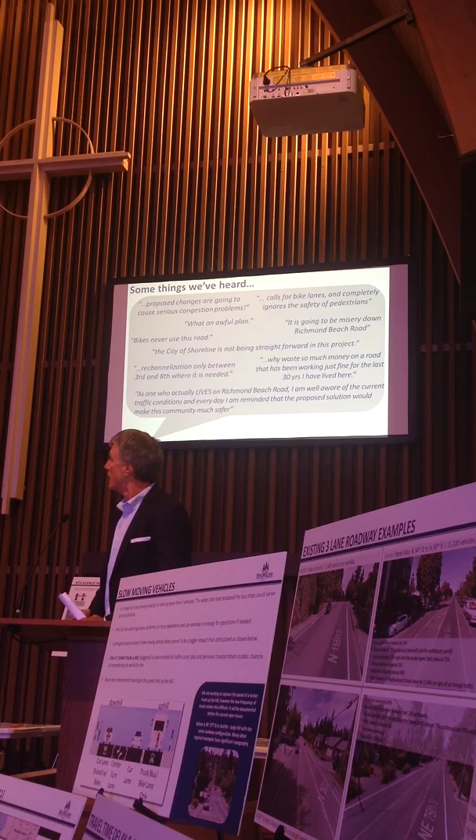Take some time to learn about what the city's talking about doing on Richmond Beach Road, but also time for us to hear what some of your thoughts and concerns are on the project. It's really early in the project, and we'll talk about that a little bit more later. It's timely to have this meeting to learn from you, and hopefully you can learn from us.

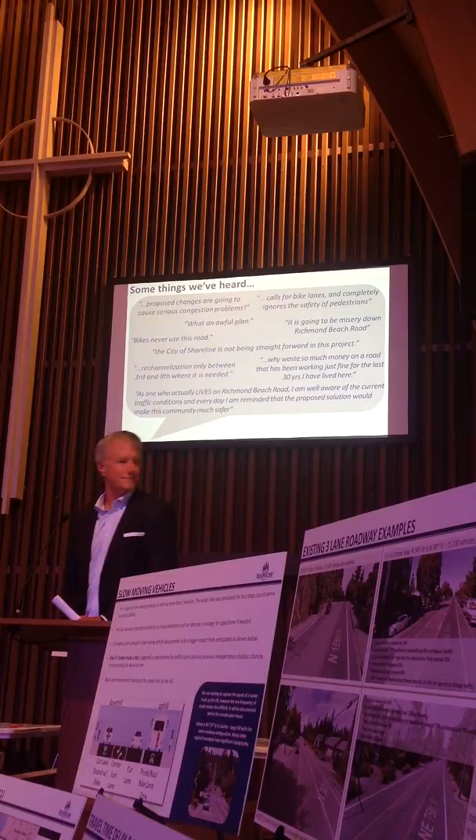For the structure of tonight's meeting, we're going to have a presentation for about a half hour. We've gotten a lot of questions over time, and we would like to take some time to share information with everybody so that we all have that same information. From a staff perspective, it helps us then talk with folks.

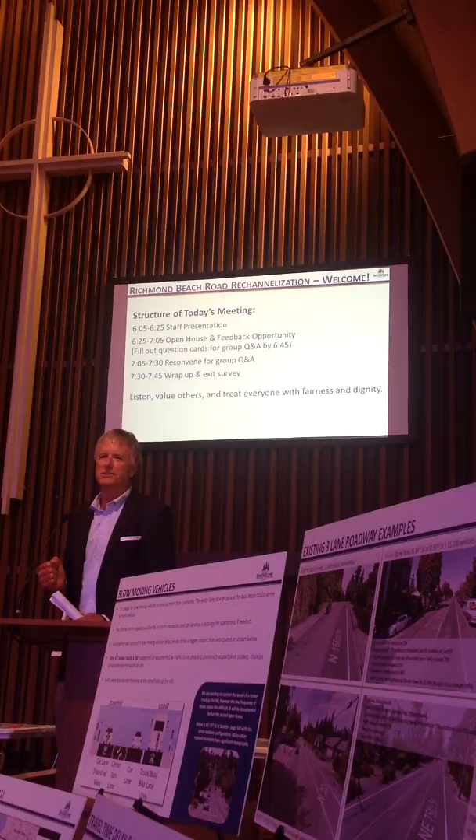There is a frequently asked question handout that's around at the different tables, and we'd like you to get one of those. It kind of guides what we're talking about tonight. We've gotten so many questions on this - usually these FAQ handouts are like 2 pages long, but this one has a lot of pages because they've been great questions, and it takes a little bit of time to answer them. Our format of tonight's presentation is also based around the questions that we've heard you ask.

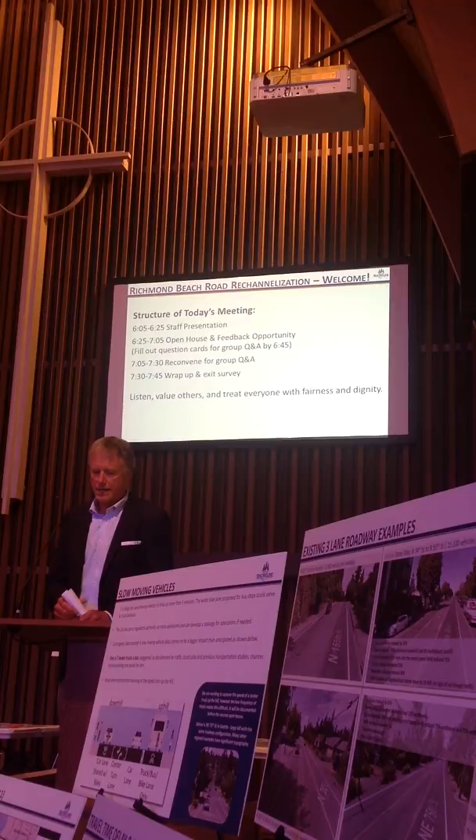We're not going to get up here and lecture you on this, that, or the other thing. We're going to try and take the questions and answer them and get the story out for everybody. There is a lot of content and detail in tonight's conversation, though we're not able to walk through them all in the presentation.

So we'll go through the presentation, then we'll take a break for about another half hour or so, a little bit longer, to be able to answer and talk about what you heard, what you learned, or if you haven't seen the board, walk through that.

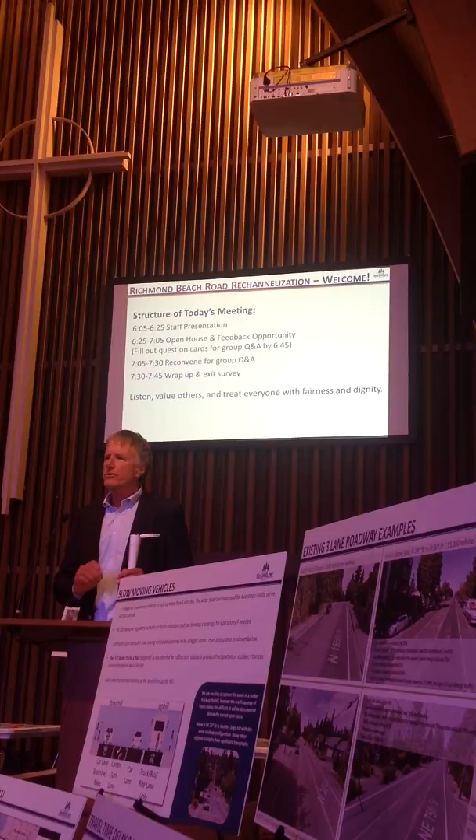In that time, you'll also find some cards with questions on them, and as you learn about it and hear from us, if there's some other questions you have, or you're not quite sure they're getting answered, please fill out that card and put them in the basket.

That's going to lead to the last part of the presentation, where we will go through all those cards and aggregate them into themes and come back and say, here's some questions we heard, and we can talk about the answers to those questions. That way we can try to answer 20 people's questions at one time.

And then about 7:30 or 7:45, we'll wrap up, close down, and we will retire out of here.

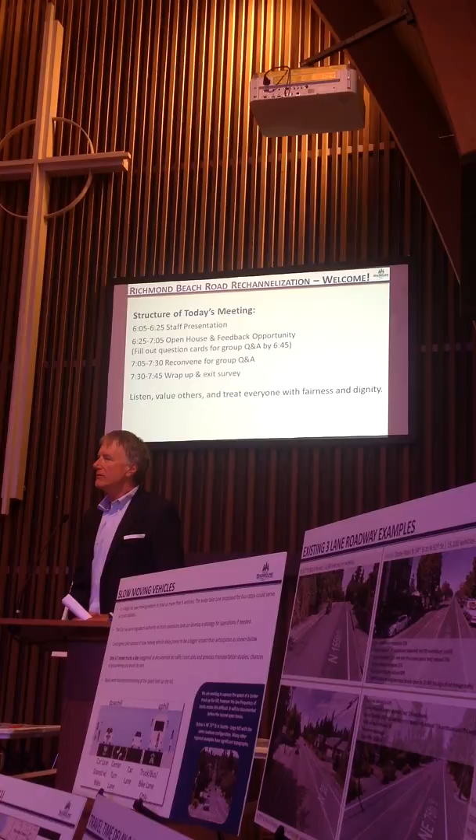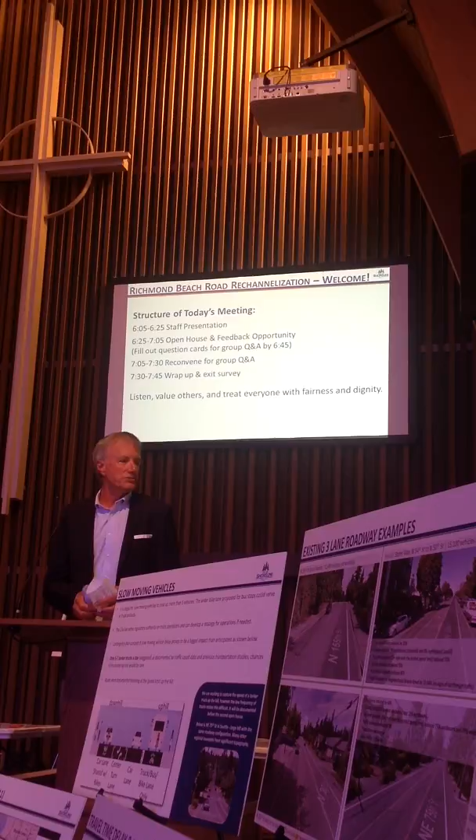With that, I'd like to introduce Kendra Dedinsky, who is our city traffic engineer and has pulled together a lot of the information for us today and can explain in whatever level of detail we need the traffic and accident history behind what we're doing here tonight.

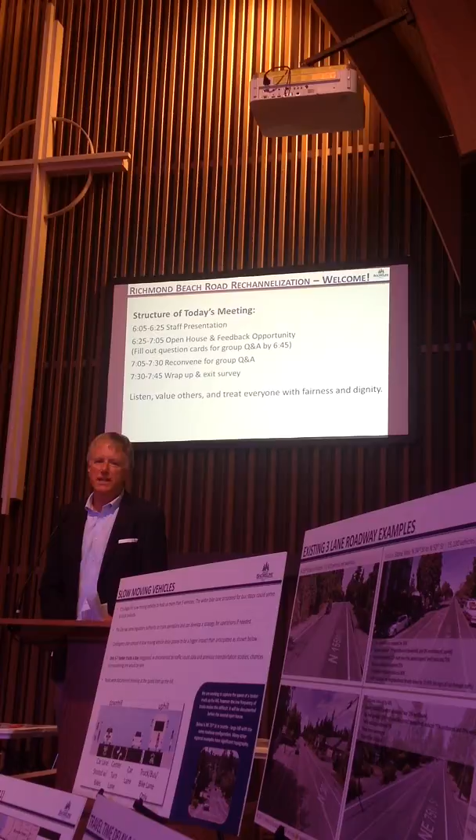Kendra. All right. Could you repeat your name, please? Yeah, Kendra Dedinsky. Oh, that's loud. Okay, you all know it now.

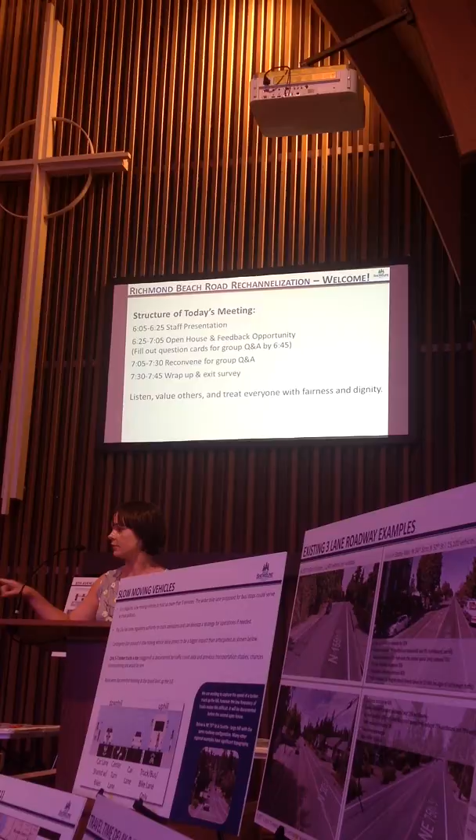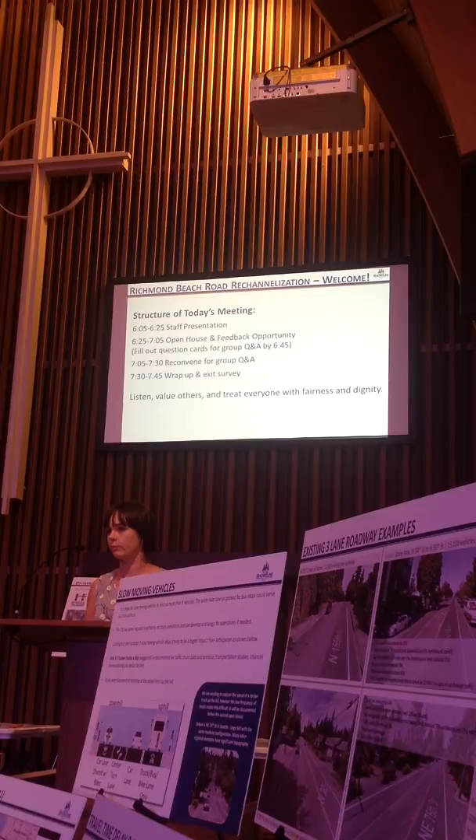One point of clarification - Randy said there's some FAQs, but those got snatched up pretty fast, so we may not have them. But if you look around at the boards here, our project website is listed, and they are available there. Those of you with smartphones can go ahead and pull them up via PDF, or check when you get home. A lot of the same content is duplicated around the room, so hopefully we're able to get to all of your questions.

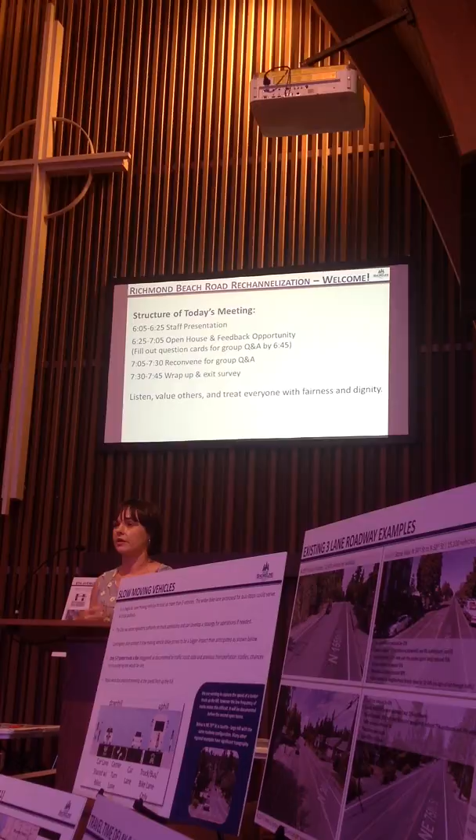All right, so we'll move into a couple of background slides, and then I'm going to show a short video. But to start with, for those who don't know already, the project is proposed to restripe Richmond Beach Road from 4 lanes to 1 lane in each direction and a center turn lane. A lot of the intersections contain some of the same functionality as they do today, retaining some turn lanes like at 8th, for example.

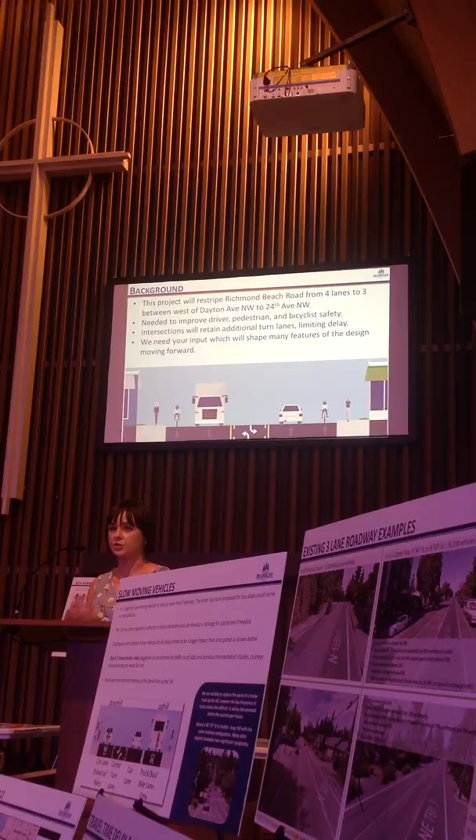We would invite you to take a hard look at some of the intersection designs we've laid out, some of which even provide travel time savings. The project is largely needed to improve pedestrian, motorist, and bicyclist safety on the corridor. Over in this station we show the history of collisions on the corridor, and what we're proposing is a proven safety countermeasure as recommended by the federal government. We'll talk more about collision history after we finish the video. We're looking for your feedback, so we hope to hear your preferences for the design choices we're proposing. Some variations on intersection design are shown in these tables, and we want to hear what you think about one option over another, or other concerns.

So how did we get here? There are a few things that set this in motion. The starting point is the 2011 Transportation Master Plan, which slated this corridor for bike lanes. But really the most important factor is safety. This strategy is a proven safety countermeasure, shown across the board to improve safety. The collision history shows where we have issues, and it's not just in a single stretch—it spans the length of the corridor, and this is a great way to address those issues. Where we are today is that Council has approved this plan and adopted it, and we're now looking to get feedback on how we refine that design. This project is responsive to where we're at today with collisions on the corridor.

We're not going to take questions right now.

Clarification—the council has approved the plan? As part of our capital improvement project, yes. So this is all kind of moot? No, not at all. We have many elements of the design that are up for refinement, and we can talk about the choices. You'll see there are multiple options and alternatives for certain locations. This is already being paid for. Let's wait, because this sounds like a question we'll answer at the end. It's a statement, actually, because you've already said this has already been approved. The project in concept has been approved; the actual project itself we're still working to define and design right now. Let's hold questions, and I can definitely answer that at the end. But we want to give context and provide information before we move forward with decisions.

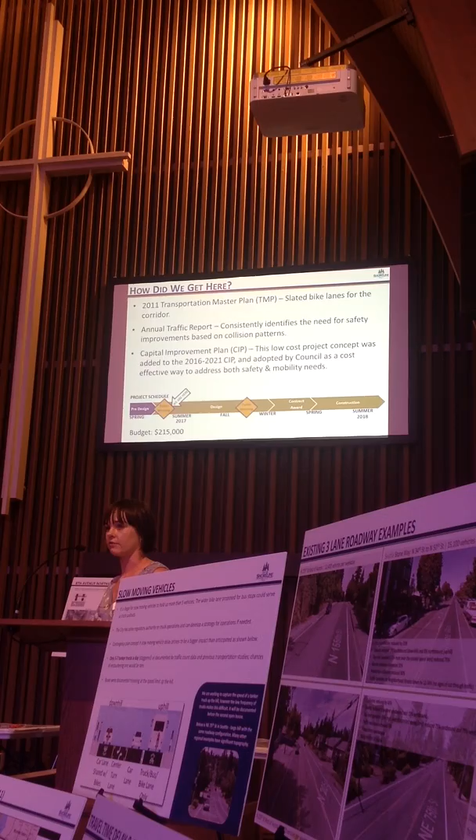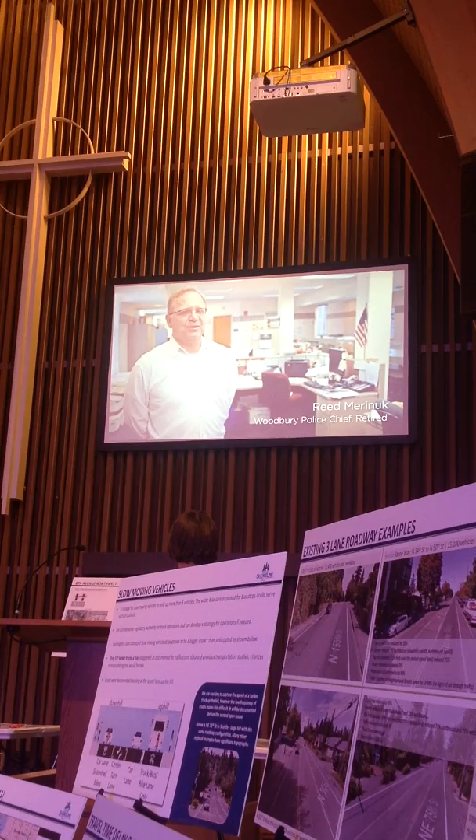The idea of a road diet to us was absolutely insane, and in terms of the police department, we weren't interested at all.

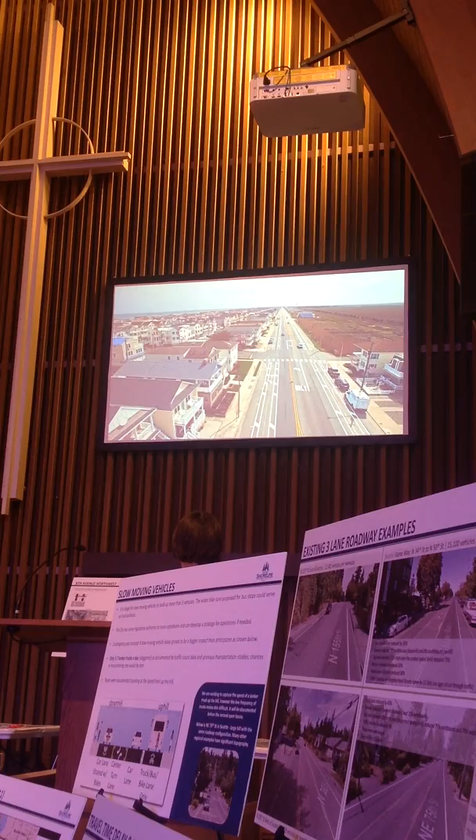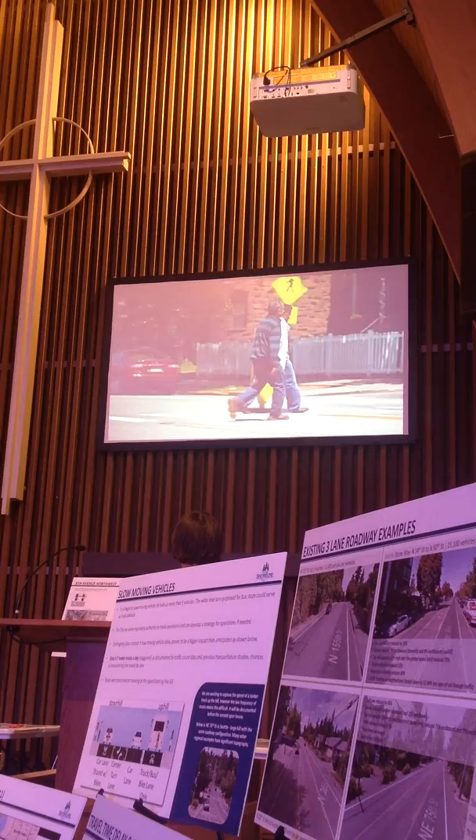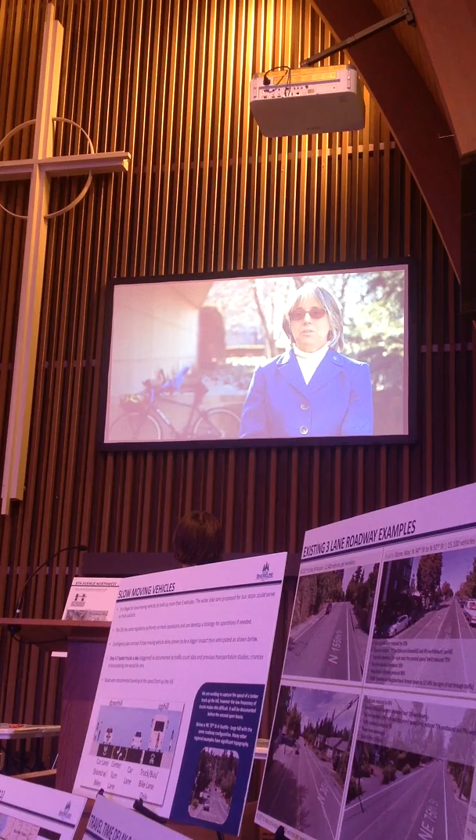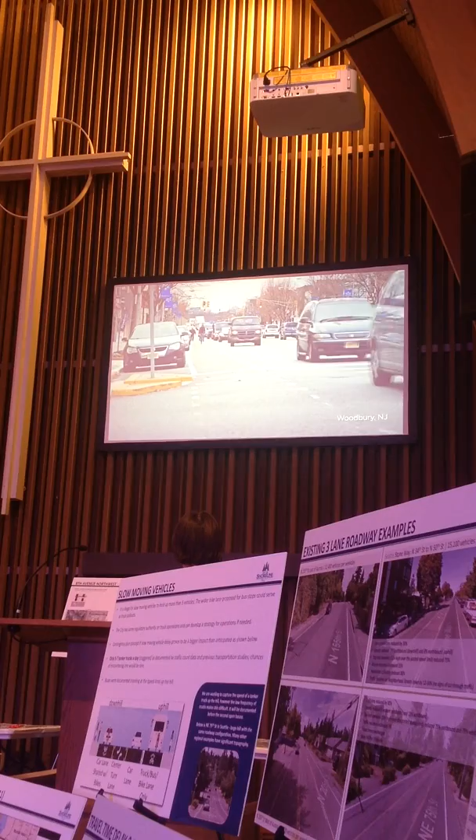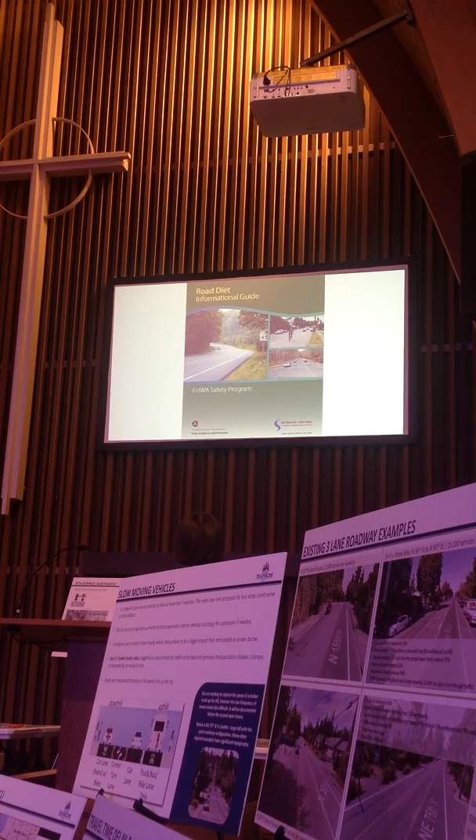Because of the tremendous safety benefits of road diets, the Federal Highway Administration designated them as a proven safety countermeasure in 2008 and encouraged their use across the country. The road diet...

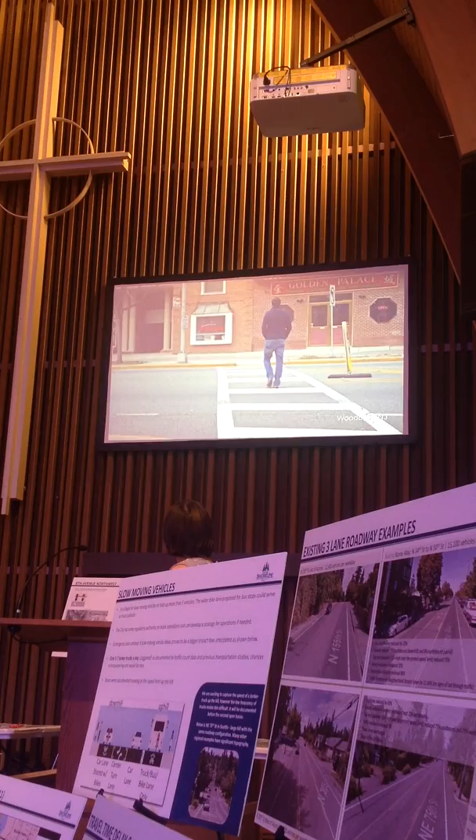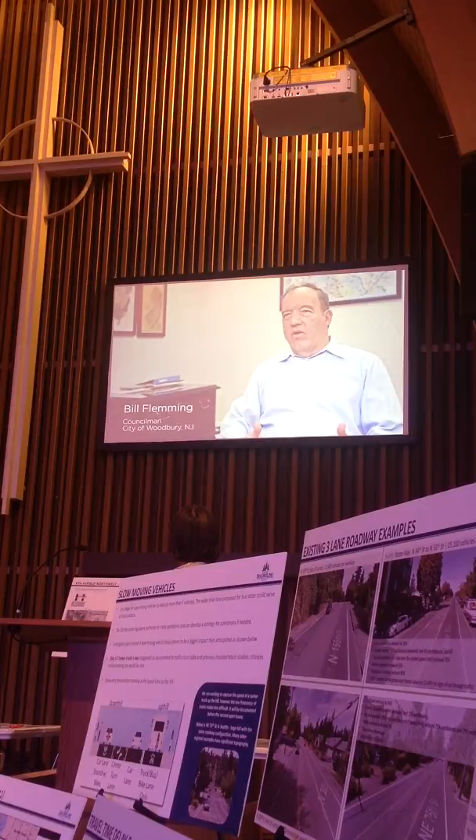Signals to the pedestrian crossing lanes, we bumped out the curbs and reduced the distances, put in countdown timers for pedestrians to be able to get across. You can see what you need to do without having to make 20 different decisions, regardless of whether you're a motorist or a pedestrian. With traffic calming, there's an appearance that the queuing is a lot longer, that traffic is waiting.

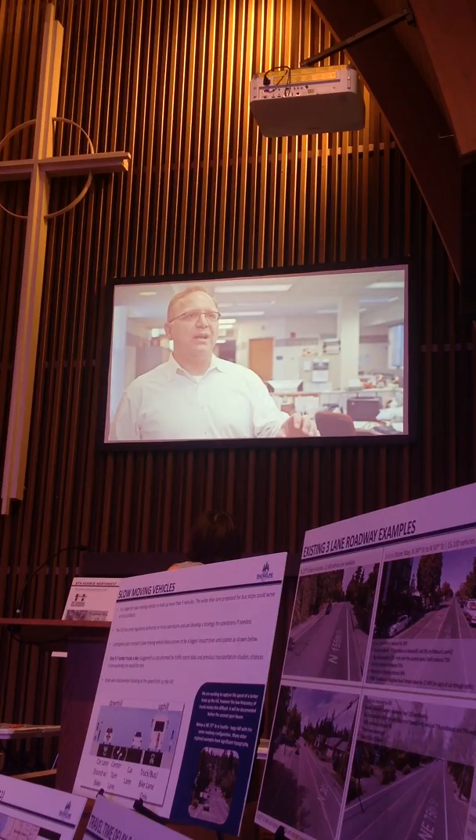And I basically defy anybody to tell me, listen, time it before, you know, we have the road diet and the traffic calming compared to what has happened since we have changed. In fact, with the traffic calming, it's the same. They're not waiting as long as they thought that they were going to wait.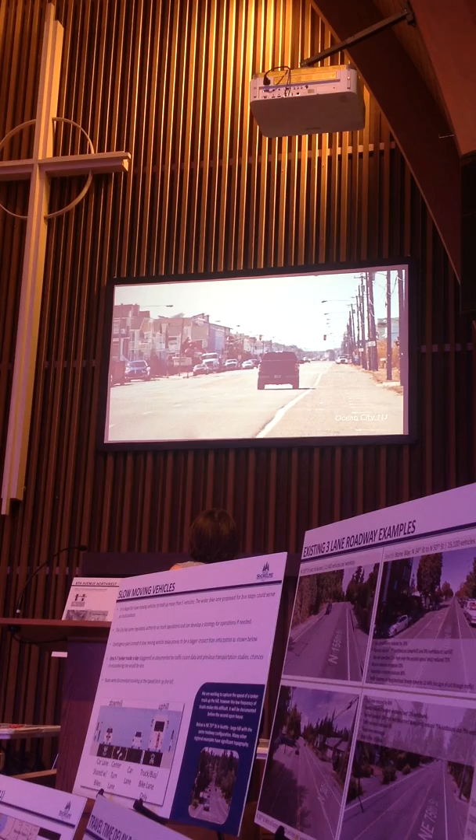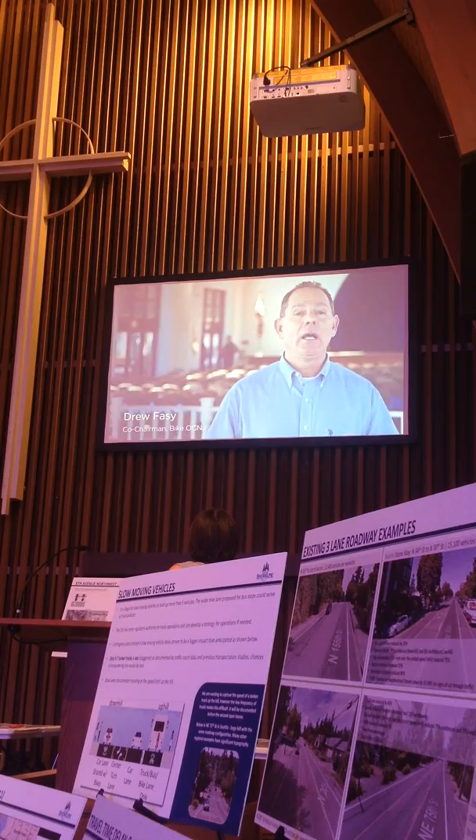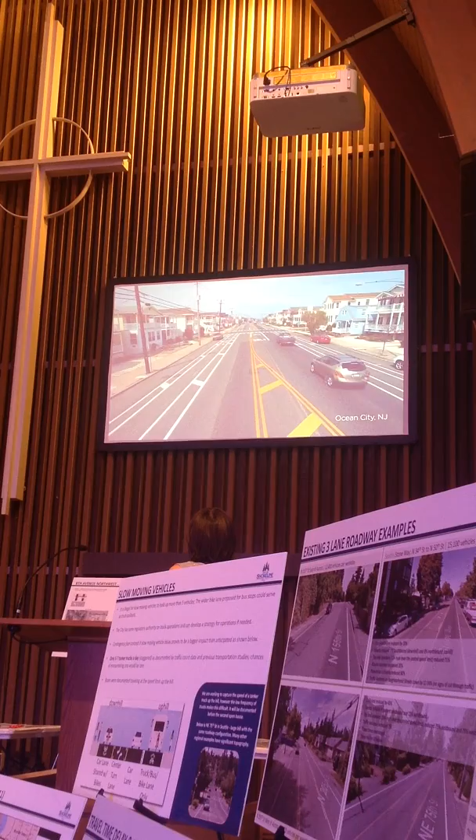The road in its previous configuration had 2 lanes in either direction, and the speeds were at times 40, 45 miles an hour in a residential area. We were very concerned about and had sort of the same fears of affecting that road negatively in terms of moving traffic, but we found very early on that the traffic moved very well and it became a much safer place for both bicycles and pedestrians.

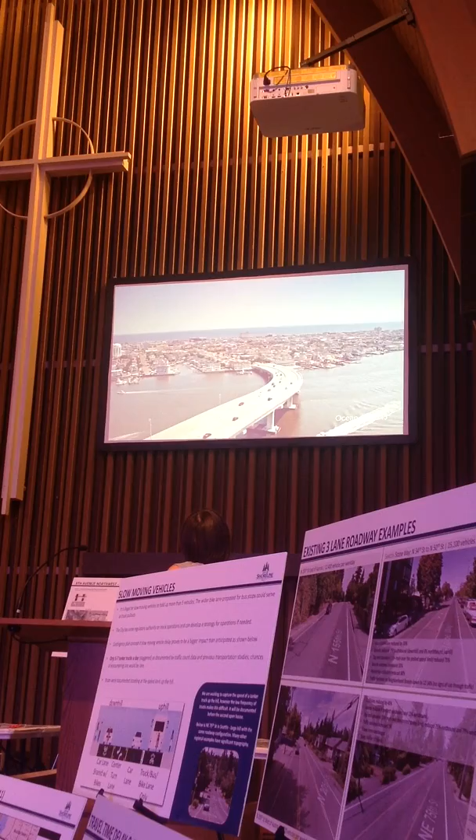Turns. When a vehicle is stopped to make a left turn, traffic can no longer flow in that lane and creates the possibility of rear-end collisions. Cars will weave to avoid stopped vehicles, which creates the possibility of sideswipe collisions. These situations create a more chaotic and unsafe environment.

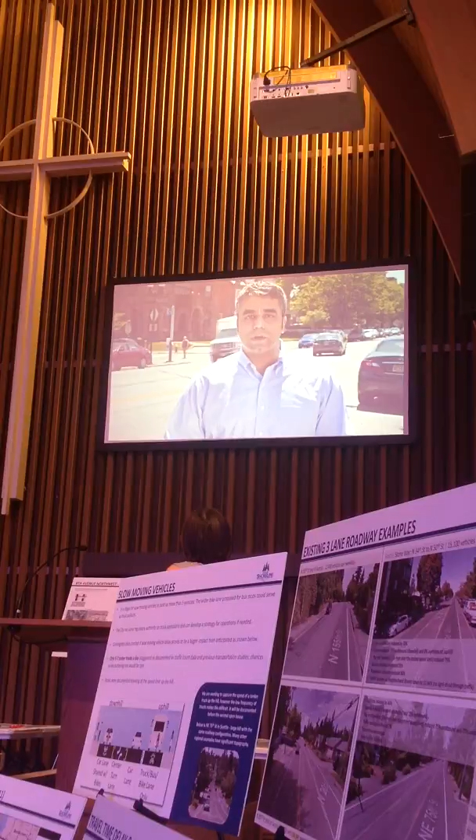4-lane roads also create issues for drivers desiring to enter the roadway. There are a lot more things that a driver has to consider, especially when making a left turn onto the road, where you have to look for a gap over multiple lanes of traffic as opposed to just one.

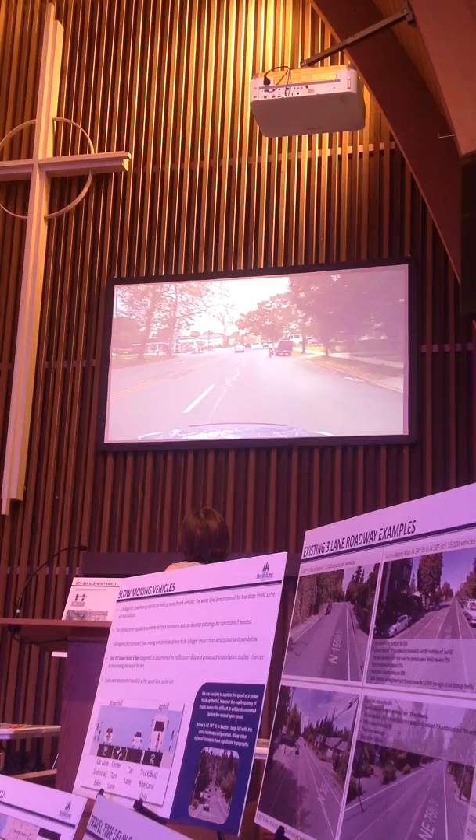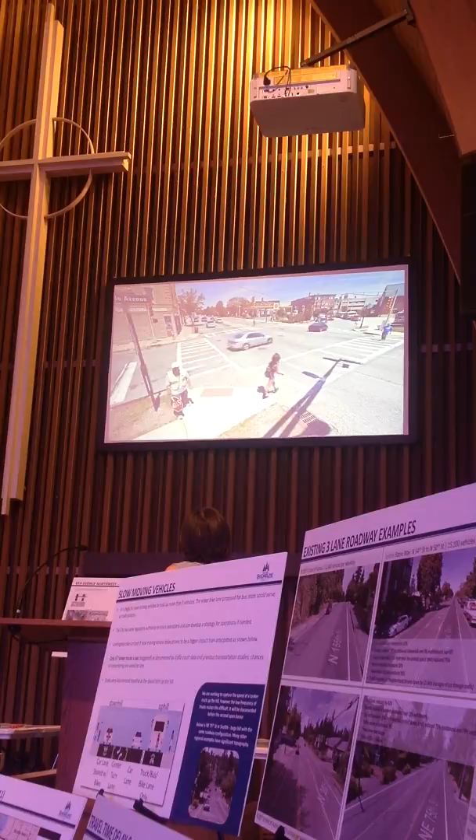For bicyclists, the lack of a dedicated facility coupled with higher speed differentials in a chaotic roadway environment can create a very uncomfortable and unsafe condition. For pedestrians, crossing a 4-lane road is much more dangerous and challenging because there's more distance to cover at a signal. At unsignalized crossings, the pedestrian needs to identify a gap across 4 lanes of traffic, and there are multiple conflict points along the way.

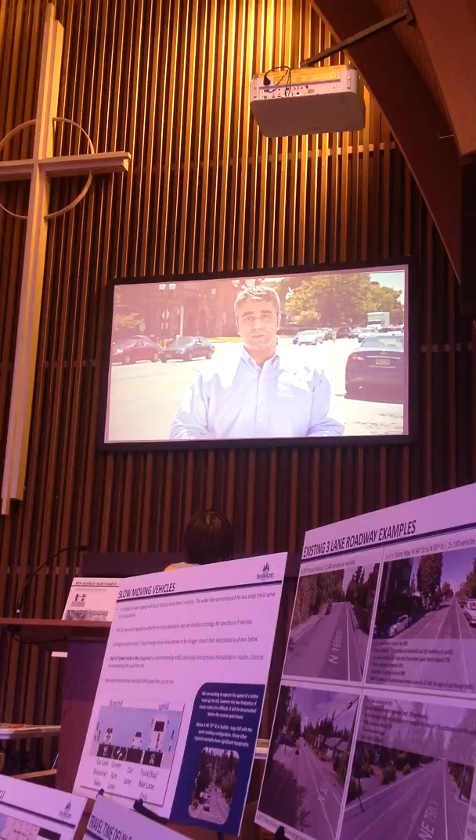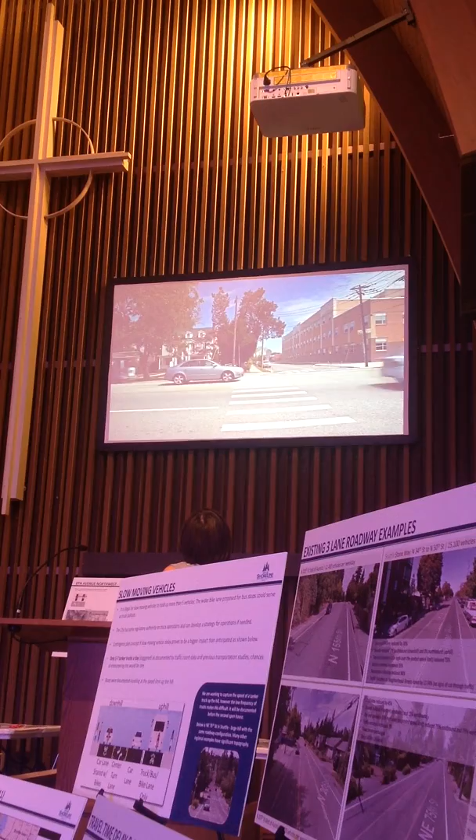A road diet consisting of a single lane in each direction with a center turn lane creates a much more orderly environment for safe travel. Left-turning vehicles have a safe place to wait before making a turn, have only 1 lane to cross, and they're not impeding through traffic. This allows a steady flow of traffic in the travel lane and also eliminates the opportunities for weaving and crashes associated with a 4-lane configuration.

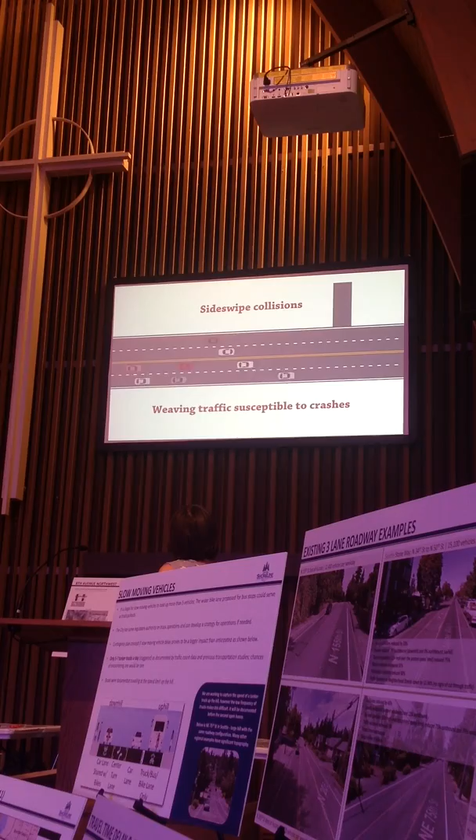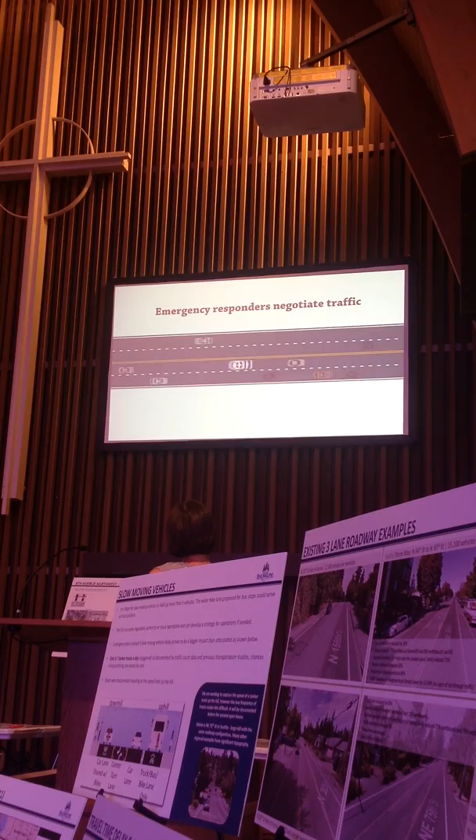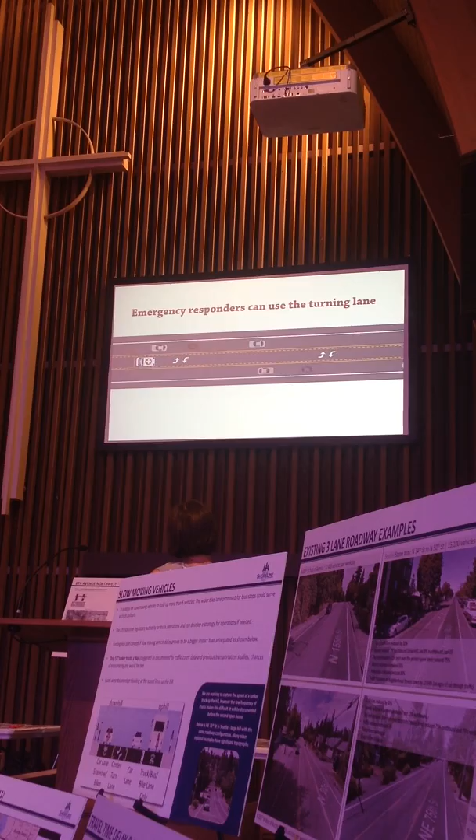The added benefit of making it safer and more efficient for automobiles is that it also provides safer and more efficient travel for emergency vehicles by providing better sight distance, less lanes to cross, and a center turn lane that can be used to avoid traffic stopped in through lanes. Because of that condition, many locations have reported their road diets as having a positive effect on EMS response.

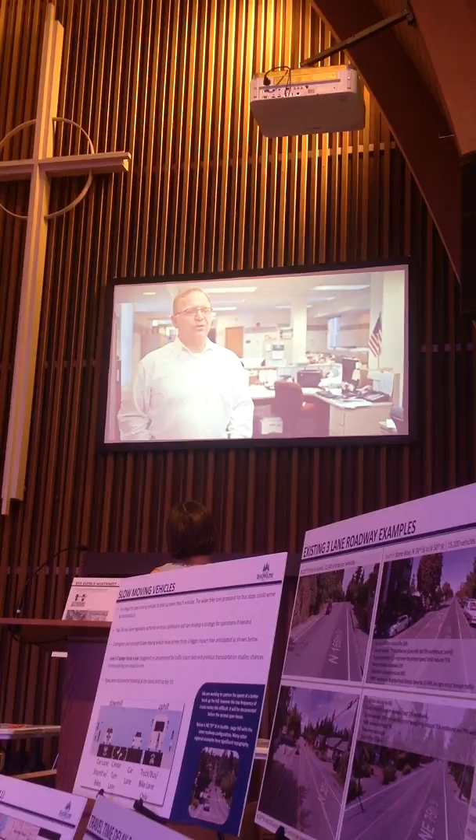This idea came up, and I'd have to explain to them what our concerns were for public safety and us. We really pride ourselves in our response time for calls for service. We tried to enforce or move towards any alternative that we could instead of going towards the road diet and traffic calming and pedestrian friendliness.

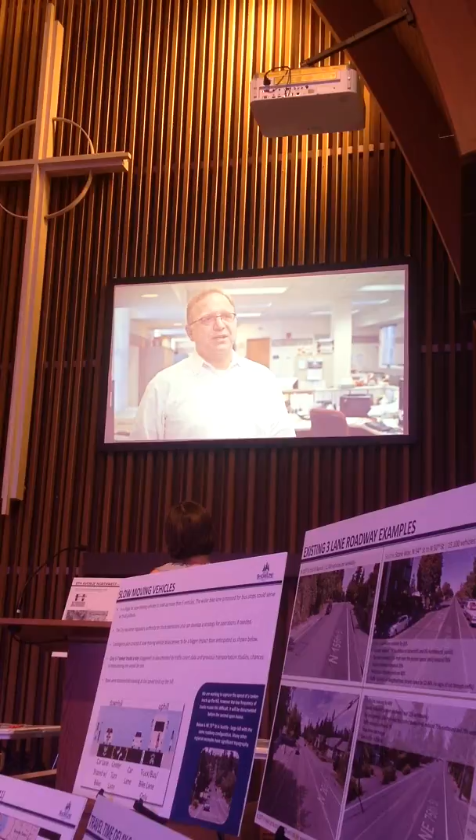We took the stance that we want to try and do this in terms of enforcement. And again, after I would say 8, 9, 10 years, we decided that, listen, our enforcement's not working the way we hoped it did. And as the police chief, I don't want to stand in the way of progress.

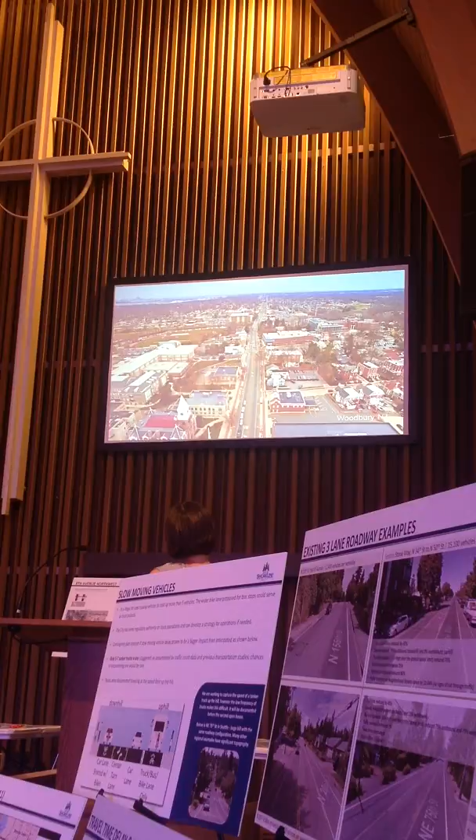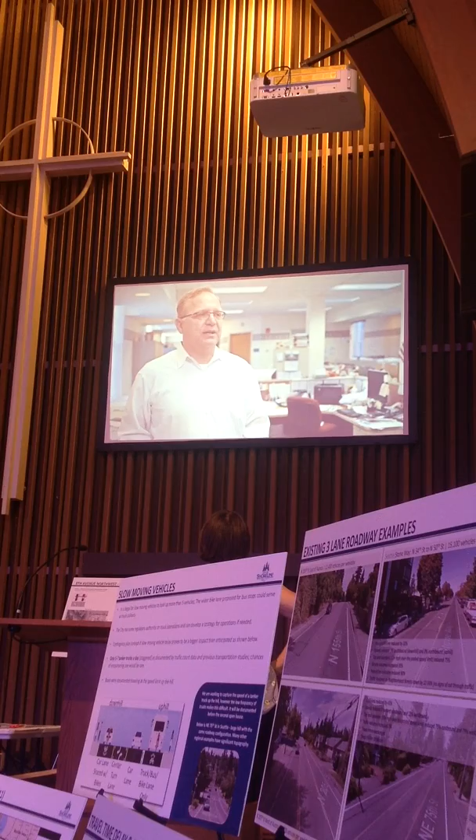So as a last alternative, this came up and we decided that this is what we're going to do. So when the alternative is put out there, and we've tried everything that we absolutely could do, and it didn't work out, I can't stand in the way of that. Fast forward about a year, the changes have occurred, and we really haven't had a problem.

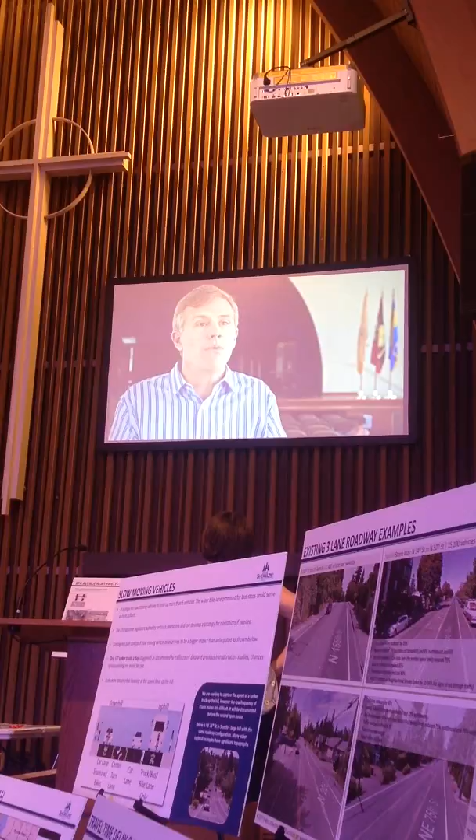With the council and politicians in our town, the engineers, we just kept discussing it till we came up with something that we felt was workable. And really what gave us the confidence was it was just paint. We said, if it doesn't work, we'll scrape the paint off and start again.

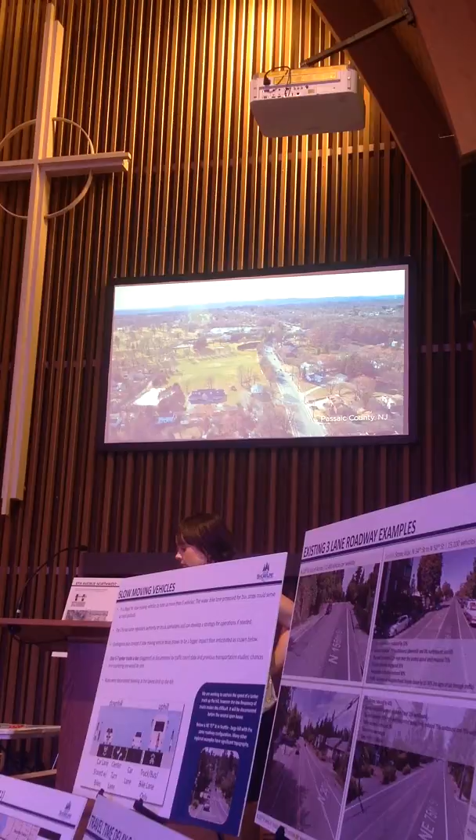I would absolutely look into the option of road diet in any community that has some of these older infrastructure facilities, whether it's a 4-lane road or otherwise. It really gives you an opportunity to revisit what that roadway or what that facility should mean to that community.

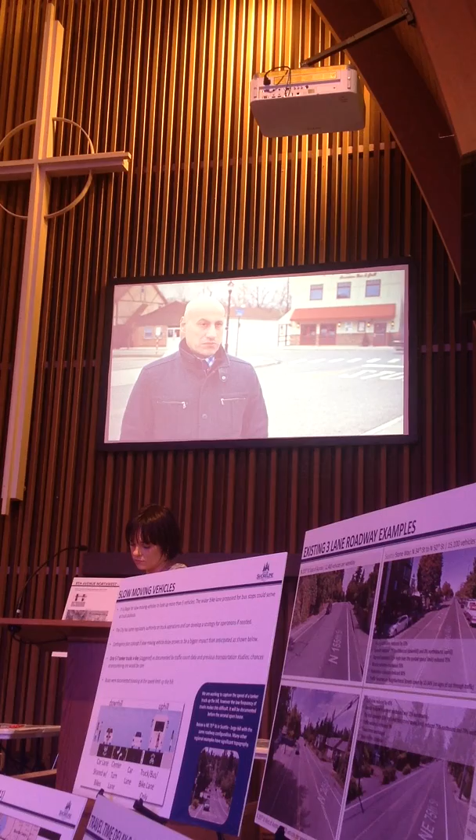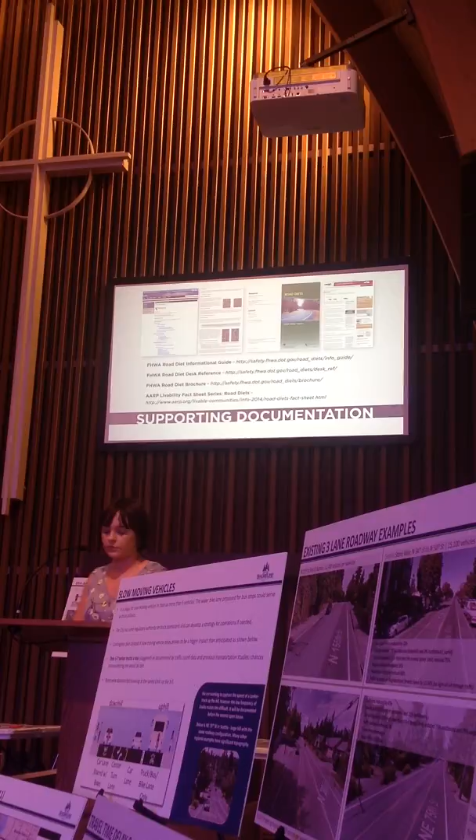All right, so we'll pop over back to our presentation again. Understandably, the characteristics of our roadway are different from the ones you saw in the video, but I want to stress that this has been implemented in many, many places with topography challenges, with buses, with all kinds of various situations, and the results are the same. They indicate that this is definitely a safety improvement regardless. So let's keep that in mind when you're trying to make an apples-to-apples comparison.

So getting into collision history now, this is really the main reason we're here today to propose this project. The collision history shows a pretty high number of collisions on this corridor: 2 classified as high accident locations, 20 injury collisions, with 9 of them occurring over the last 3 years. This is really an important factor. The societal cost of an injury collision is on the low end $100,000 each. So when you consider the overall project cost, which is quite low, this project is really a benefit to us as a society too, given the burden of those injury collisions.

Some contributing factors are speed and speed differential - when there's a variation between speeds on the road, it creates a really hard environment for drivers, pedestrians, and bicyclists to navigate. It makes it hard to gauge, when you're trying to turn from a driveway or side street, how fast a driver is going, because they could be going anywhere from 30 to 45 miles per hour on a typical day. Sight distance limitations are obviously a consideration too for anybody turning from a side street or driveway - think QFC, for example, where I frequent. This is an issue. So the bike lane provides a little extra space for people to scoot forward and see a little better - another way this is an improvement.

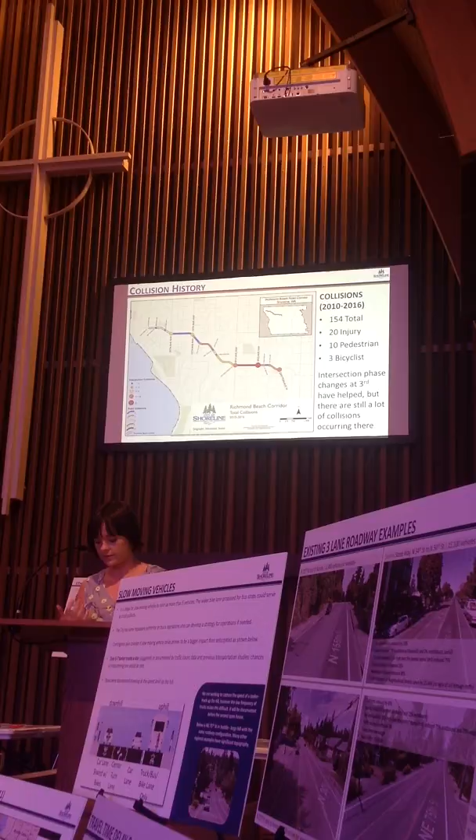So we'll go to the next slide.

So going to the next slide. Some of the ways this 3-lane configuration improves collision safety: you saw in the video, fewer lanes means a simpler driver task. There are fewer conflict points and fewer things you have to focus on, so it really simplifies that action. Sight distance to oncoming drivers is improved - you're not shielded by one driver in one lane that prevents you from seeing the driver in the adjacent lane. The speed differential is lower because the prudent driver sets the speed.

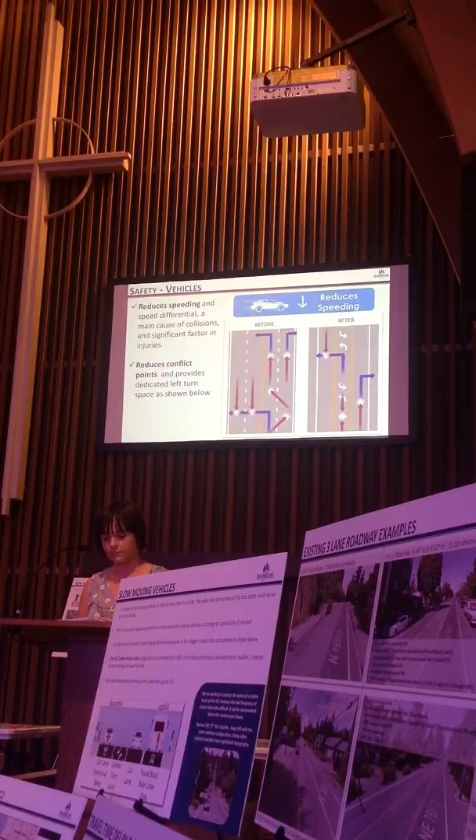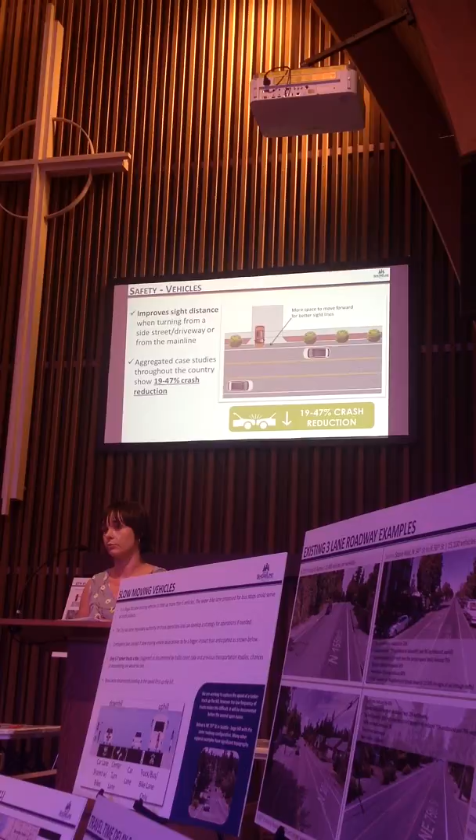So we just talked about how it improves sight distance. This is just showing a diagram of the space you get to pull forward a little further to see oncoming traffic - a real benefit to people on side streets or driveways. I wanted to point out too, echoing what was said in the video, that this type of reconfiguration has been used on such a widespread basis that the federal government has actually approved it as a proven safety countermeasure - meaning they've seen in case studies that it has had, on the very lowest end, a safety improvement of 19% or more. So we'll go to the next slide.

As we saw, the safety benefits to pedestrians are pretty clear. Fewer lanes means reduced risk for pedestrians. It reduces the crossing length, so that's a benefit as well, less time out in traffic. It also allows the median space in some locations to be striped so you can use it as a refuge to stagger your movement across the street.

I wanted to point out too, as you see on the slide, most pedestrians are struck when they're trying to cross the street, not when they're walking along it. So we've gotten a lot of comments about sidewalk width and why can't we just widen the sidewalks for pedestrians.

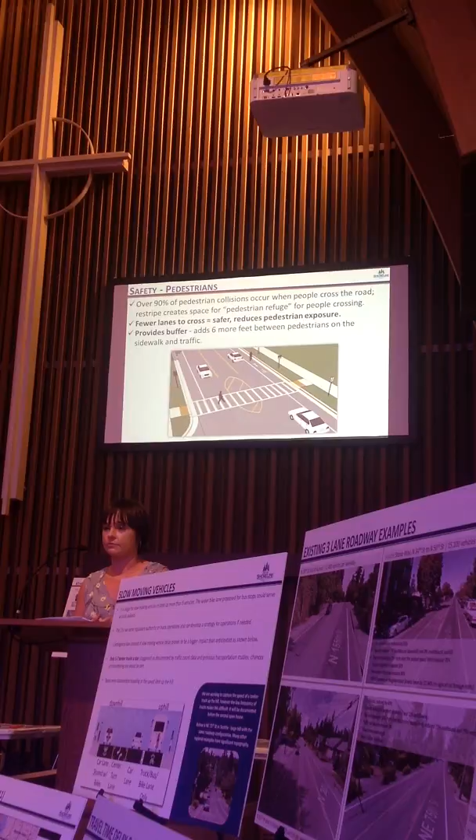Well, there's a couple of reasons for that. One is that sidewalks are built right up to the right-of-way, so widening them would really require acquiring additional right-of-way, which is not great for residents that live along the road. But also, it doesn't solve the problem of pedestrian collisions, since those occur when people are trying to cross.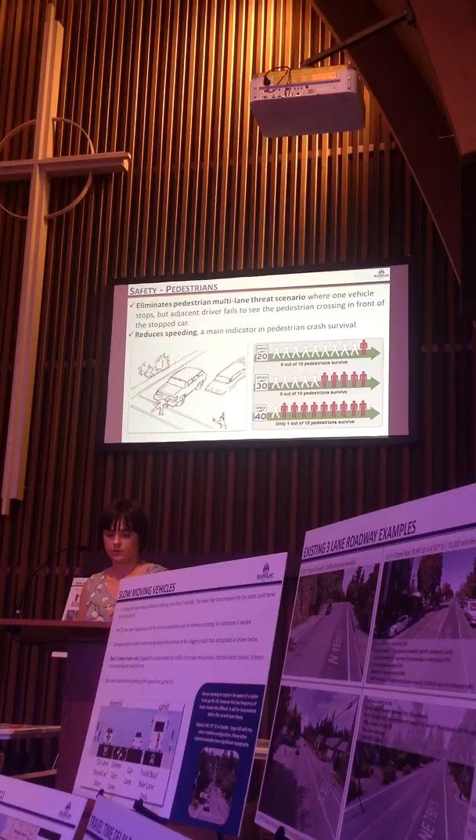Just yesterday my staff told me he helped up a gentleman who had fallen off his bike trying to transition to the sidewalk because he didn't feel safe riding in the lane anymore. We've had 3 bicycle injury collisions over the last 3 years, and our data really substantiates that there are bicyclists using the corridor. So this is an important consideration as well.

Next slide. Getting into what a lot of you care about maybe the most: travel delays. I know you can't see this, but there are stations throughout the meeting showing the travel time delay for the entire corridor, thinking about traveling east of Dayton to 23rd, which was our target study area. We've measured that, run it through models, and calibrated it in real life to capture it as best we possibly can.

In calculating those travel times, we erred on the side of assuming the worst, so what you'll see is about a 51-second delay anticipated during peak hours, between 4:45 and 5:30. We haven't done the AM peak yet, and we'll do that as part of our ongoing design refinement.

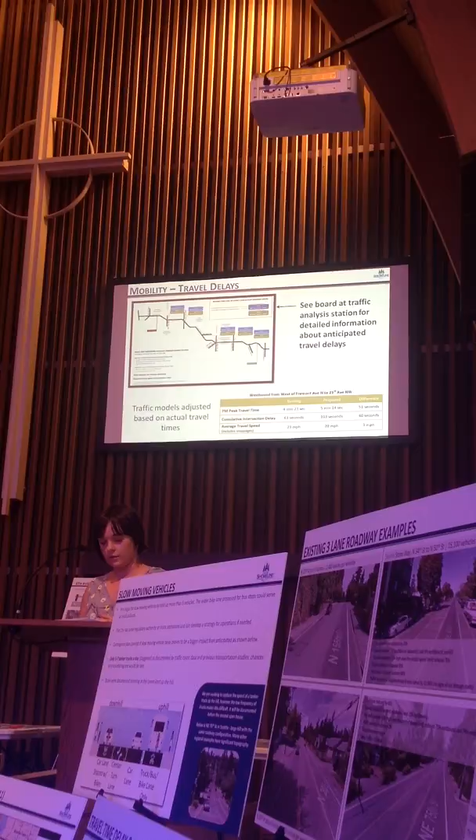There's also good information about travel time delays if you're traveling on the side streets as well, presented at these stations, getting into intersection-specific level detail. You'll see your average delay when waiting to take a left turn onto or off a street, and some options presented that might save you time. We want your feedback on what you think of those. Go ahead and go to the next slide.

Talking a little bit about the city's standard maximum acceptable delay. You may have heard the term level of service or concurrency - it's all describing the same thing. The Washington State law requires jurisdictions to adopt a level of service standard. In Shoreline, we've adopted the one shown on the screen, also provided on a board over here. The city's project must meet this standard, and any new development that comes into Shoreline must also show that it can meet this standard. This is how we enforce the maximum level of delay that we're comfortable with as a city, as adopted by your council.

I'd like to also say that the level of service of intersections ranges from A to F. We've adopted D, which generally means an average wait of 35 to 55 seconds per vehicle. But I want to point out that we shouldn't be striving for A, because that basically indicates that you've overbuilt your roadway - you've spent a lot of money to make things wide and serve right away, and maybe that's not always the best way to go about a design. Just keep that in mind.

All right, so next slide.

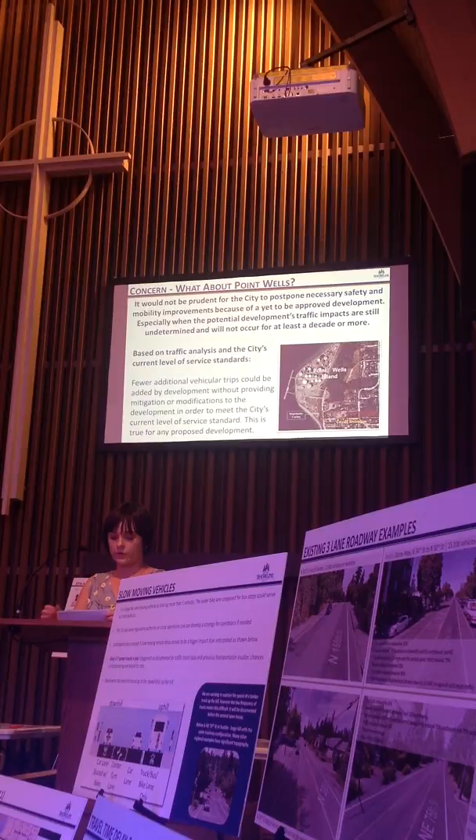I'm going to get into some of the high-level concerns that we've heard about, which are echoed throughout the room as well, so we'll talk about those in more detail at the stations. We've heard a lot of rumblings and anxiety about Point Wells, and I want to reflect back on that last slide you saw.

In terms of concurrency, the city is on the hook to enforce a level of service standard that's currently in place. Any new development that comes into the city, whether or not we're permitting it, is required to meet that standard or adjust in order to meet that standard.

If you're not aware, this Point Wells development that's proposed is at the very end of Richmond Beach Drive. Its only access currently in and out is via Richmond Beach Drive and this corridor. It's currently located and permitted by Snohomish County - the application has not been approved yet, it's currently in process. But what's notable here is that we have an existing safety problem, and any potential development at Point Wells is probably decades away. So we don't want to hold our breath waiting for something that may or may not happen for the relative low cost of this improvement project.

If you're interested in this topic, there's more information displayed here in the room and staff available to talk to you about it. Next slide.

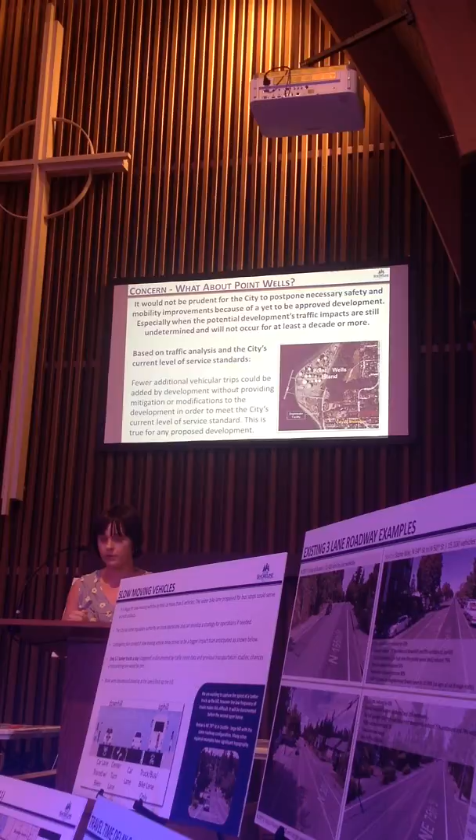We've heard a lot of concern about waiting behind stopped buses, and there's a couple of diagrams that get at that issue - one located right over here, and another that allows you to drive toy cars to see how that plays out in reality. We have a couple of designs that move the lanes asymmetrically so that you have a full width bus pull-out space.

We think this would be a pretty good option at intersections like 3rd or 8th, where the left turn lane is occupied a lot of the time. When you think about stretches along the hill section, for example, where there's bus stops at 190th, buses stop there infrequently, and even less frequently would that left turn lane space be occupied because there's only single residences along that stretch. So keep that in mind when thinking about the trade-offs of the asymmetrical version versus the more standard version.

Probably notable to point out too that there's only a maximum of 4 buses per hour at any time on the part of the corridor we're going to be impacting - Metro buses. So we're only talking about Metro buses here for the time being, but we would want to hear your feedback about school buses as well. Keep that in mind when you're talking to staff at the stations.

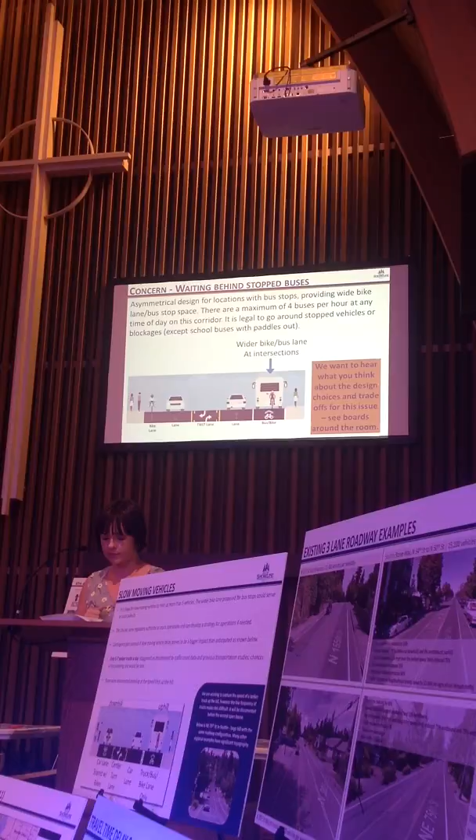So the other concern we've heard about - next slide - is following slow-moving vehicles.

Maybe some of you are aware that it's illegal for a slow-moving vehicle to hold up more than 5 cars. That's a consideration, and we have some regulatory authority in terms of working through a strategy with the asphalt plant, so that's something we can consider.

But even beyond that, we have a backup plan. If what we're recommending really proves to not work well, or we're seeing more people impacted than expected, we have this plan shown on the slide and boards that would allow commercial trucks and buses to use the right lane to climb, so they wouldn't hold up vehicle traffic. We want to hear from you on this, but the number of tanker trucks we see on the corridor each day is only about 5, and they're staggered, so the frequency of running into that is pretty rare.

In fact, when we did our travel time studies, we weren't even able to capture that, especially during the peak hour. We're still working on capturing the actual travel speed of those tanker trucks, since we weren't able to see it in the field. I'll mention too that I'm a resident of this neighborhood, and I haven't come across them very frequently either, so we're still working on gathering that data, and we'll be updating the website and FAQs accordingly.

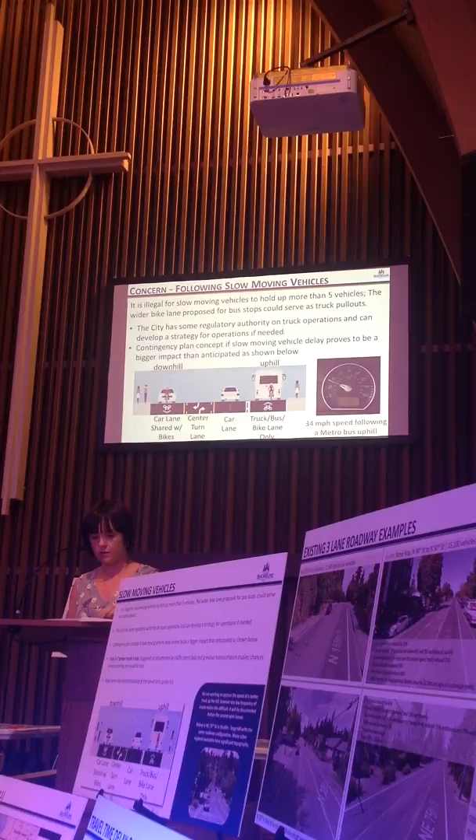Another concern is garbage pickup and delivery blockages. I want to point out, because there's been discussion about it, that it is legal to go around stopped vehicles. It's not legal to pass a moving vehicle, but if something is stopped and blocking a lane, it's possible to go around legally, and this is how every other 2-lane and 3-lane roadway functions.

The picture on the right is a garbage truck on 15th Avenue as an example. It's even slid off the curb quite a few feet, and you can see there's still quite a bit of room to navigate around that garbage truck with clear sight lines.

So consider this: as that event occurs on the road, in this stretch of the hill in particular, it's looking like that's not going to be a very big impact, given the good sight lines and an infrequently occupied left turn lane. Not a lot of people turn from that left turn lane on the hill, so there will be plenty of space to navigate around.

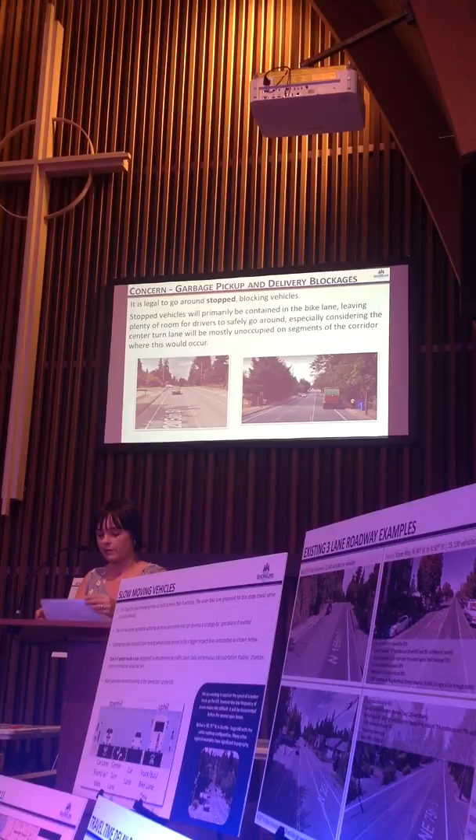One thing to consider too is that checking to your left to see a person coming up on your side may be a more risky or limited sight distance check than the straight-on view in front of you to see that clear left turn lane. Just something to think about as you're talking through these issues at the stations.